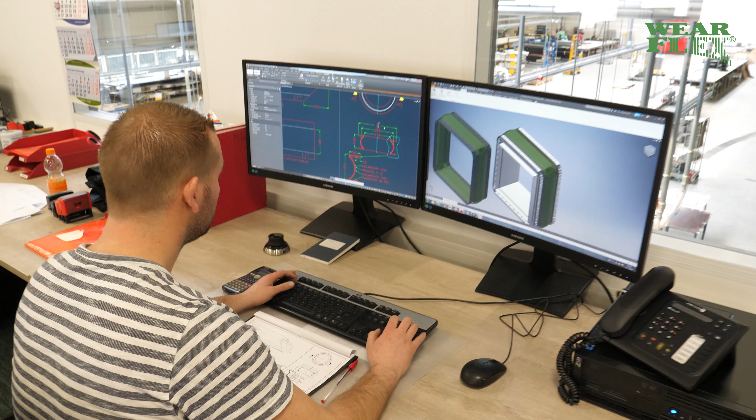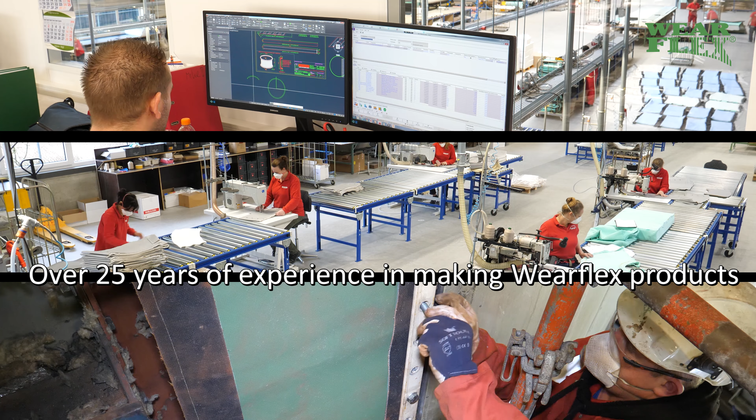In this film, we introduce our Wearflex department at the Steenbergen location. We have invested in a new facility where we design, engineer, and produce solutions made out of high-temperature technical fabrics. We have over 25 years of experience in making Wearflex products, and we are one of the leading manufacturers and suppliers of fabric, rubber, and metal expansion joints.

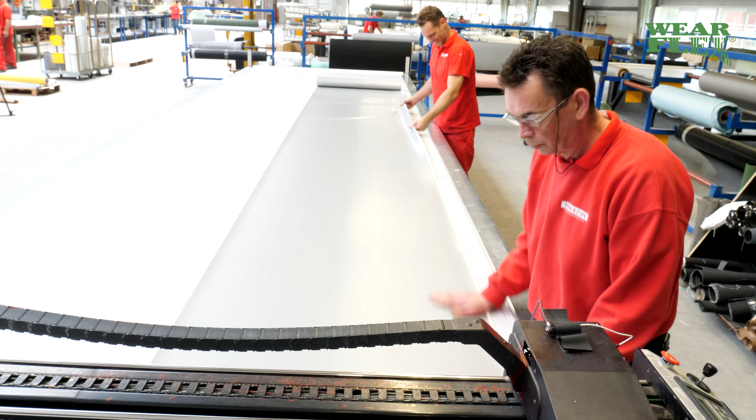In-house production, high-quality, tailor-made solutions specifically designed to meet our customer requirements.

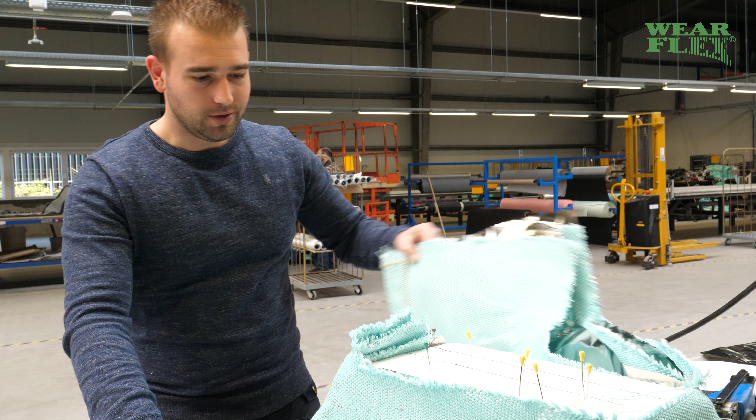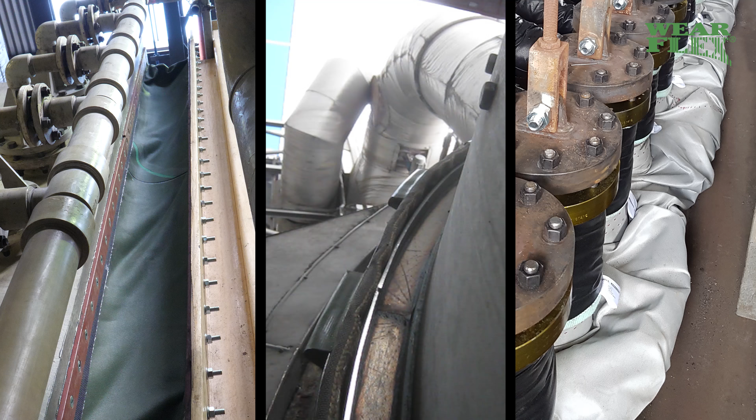Our products are vital components in most of today's energy and industrial plants, such as power plants and waste incinerators, petrochemical and chemical plants, cement works and steel works. Our main product groups are expansion joints, dynamic seals, and tube seals.

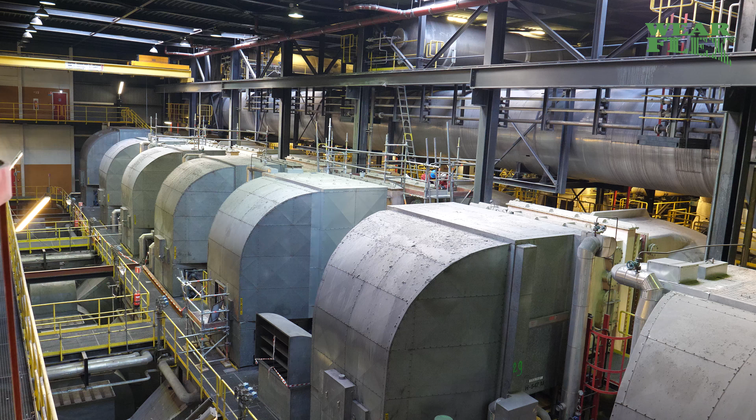Our Wearflex solutions help you to have a better controllable process in your assets due to CO2 reduction, less heat loss, safer working environment, and better efficiency.

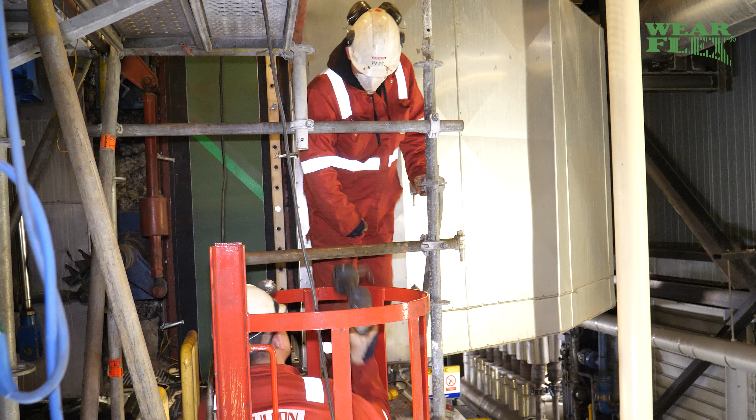We are true solution providers. We provide high-temperature sealing solutions.

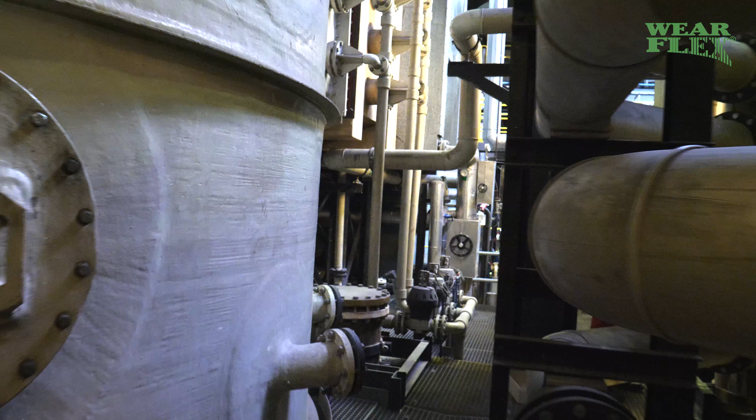First, we inspect and assess the situation by using the latest thermal imaging technology. Our skilled engineers can inspect and report the conditions of all your expansion joints.

With our know-how, we fulfill our customers' needs and requirements.

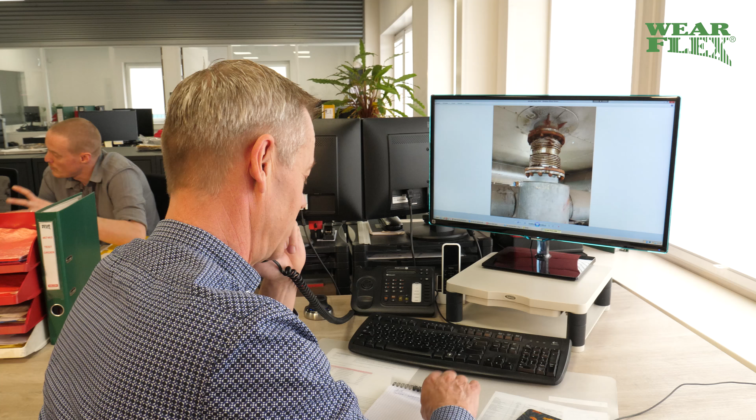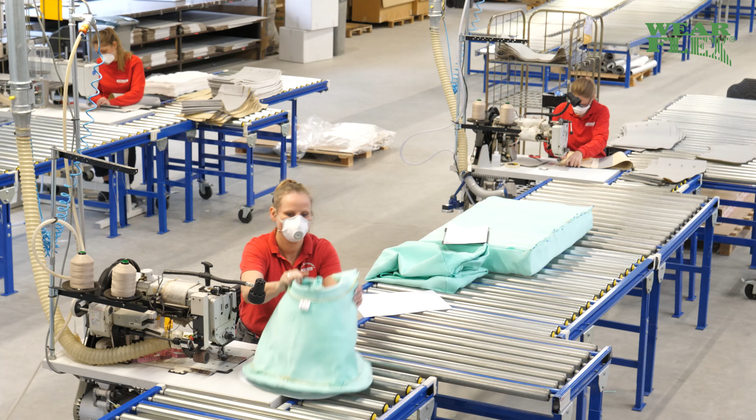Our handmade and tailor-made expansion joints are individually manufactured in our brand new production facility at the Wearflex factory in Steenbergen, the Netherlands, using the highest quality materials and highly skilled professionals.

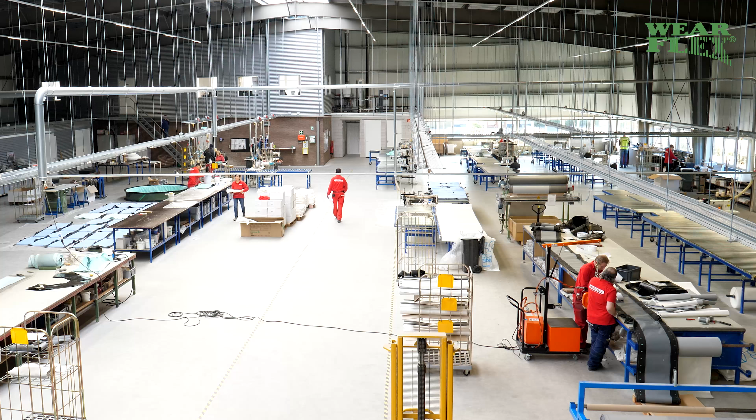Based on the application and your requirements, we will advise the best expansion joint possible for your specific application. Our team will install the expansion joints in your plant.

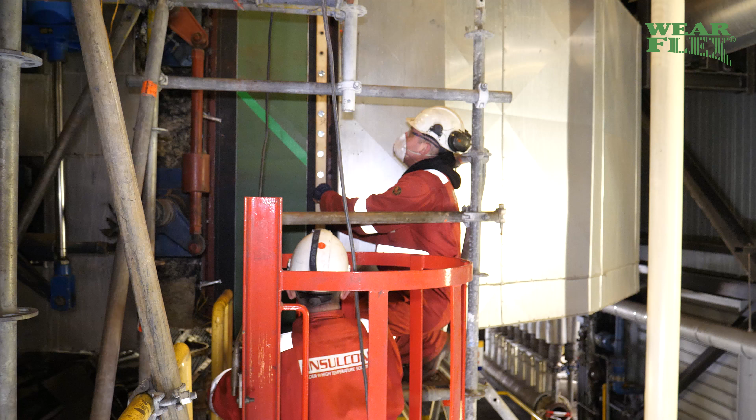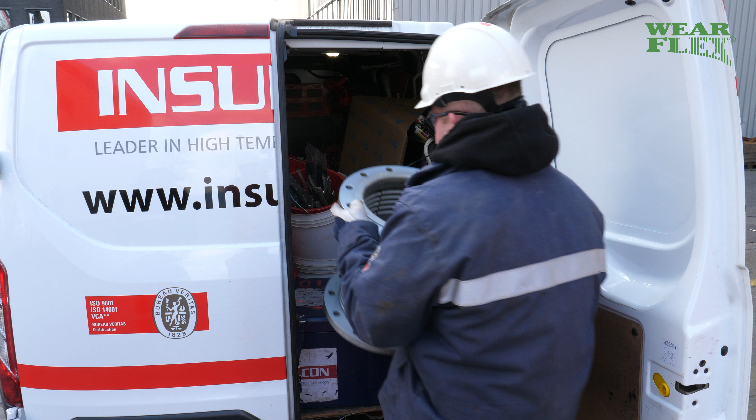At Wearflex, we provide you with full service and maintenance, offering you the complete package.

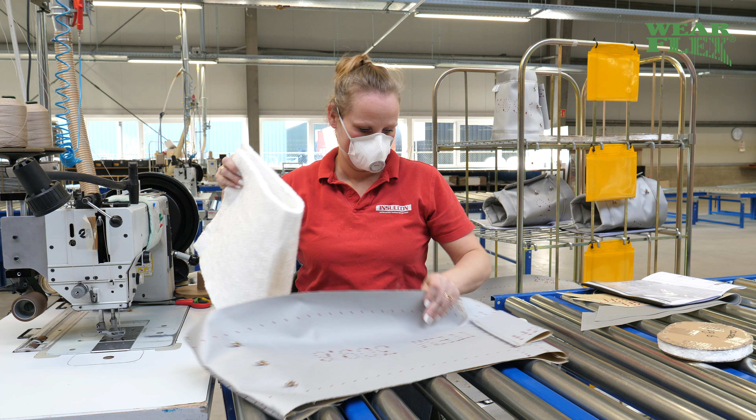Part of the Insulcon Group with years of experience. In-house design and production, providing you with high-temperature solutions.

Wearflex is part of Insulcon. The Insulcon Group, the leader in high-temperature solutions.